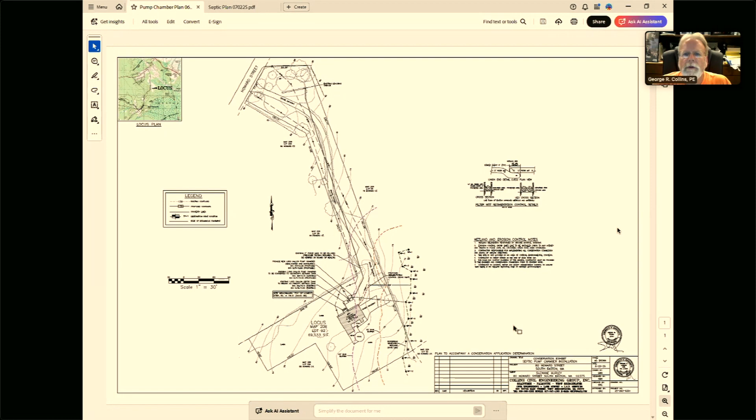Okay. So this is Howard Street up here. This is all existing long paved driveway that goes down to an existing dwelling here. And let's see, I am going to zoom in a little bit here. And then this is a bordering vegetated wetland, primarily located off-site. We have wetland flags 1 through 12 shown in green. The associated 50-foot buffer zone is shown in orange, and the 100-foot buffer zone is shown in magenta.

This right here is the proposed pump chamber. The pump chamber itself is 107 feet from wetland flag 7, which is the closest wetland flag to that activity. I am proposing sedimentation control in this particular area here. So basically, we needed just a little bit of room to back the tank delivery truck onto the property and to deliver the tank and to set the tank.

So there'll be an excavation right here, a little bit larger than the tank itself. And the tank truck will come in, back up, set the tank, and then the area will be loamed and seeded after everything's all hooked up and the electrical connections are all made. The wetland delineation was performed by Brooke Monroe, our wetland consultant.

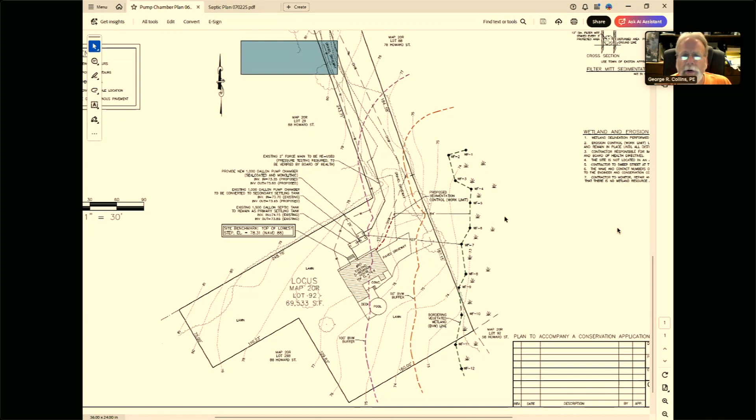So I put this plan together because I wanted to get on the agenda, and this is the applicable part of the project that is within jurisdiction. If you're interested, I could also share the whole septic design just so you have a little better understanding, if you're okay with that. I think it'd be helpful to see it if you don't mind. So let's see here. There we go. Is that a different plan there? Yeah.

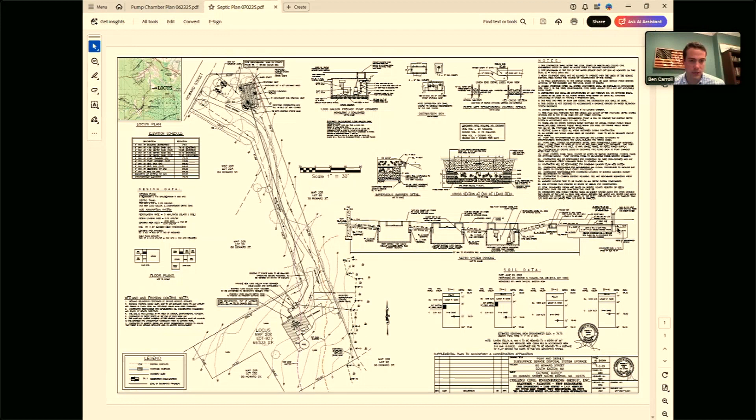Yeah. So basically, we were kind of in a big rush, so we just put together the plan showing the applicable portion of the project for the request for determination of applicability application. So the actual leaching field is going up here. There's an existing leaching field up here, and we're putting in a new leaching field. We're utilizing the same force main. There's a 2-inch pipe that pumps up the hill. Wow. To the leaching field. And basically that's all existing. And that line has been pressure tested, so we know that it can be reused.

So again, the actual project scope from the commission's perspective is identical. You have the 107 feet to the proposed tank. We have the proposed sedimentation control. And again, it's really just to accommodate the delivery of the tank. This is an existing lawn area, so the tank delivery truck can back down the driveway, deliver the tank, and take off.

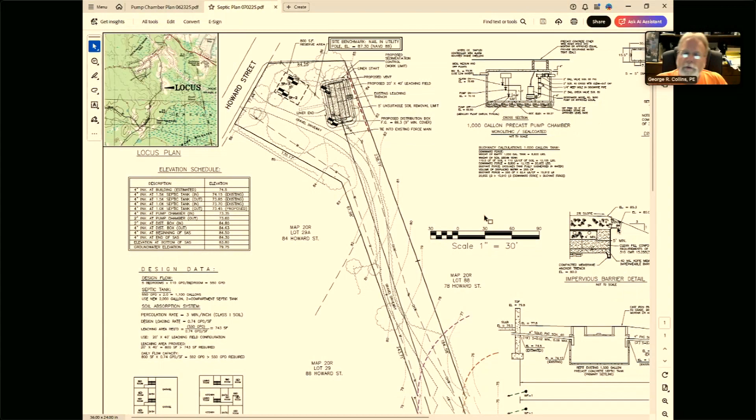And then we're going to tie into that existing force main, and as far as your jurisdiction is concerned, that's where the work will finish. And then up here is where the new leaching field is going to go, which is over 200 feet from the wetland. Just to kind of paint you a picture of the whole project.

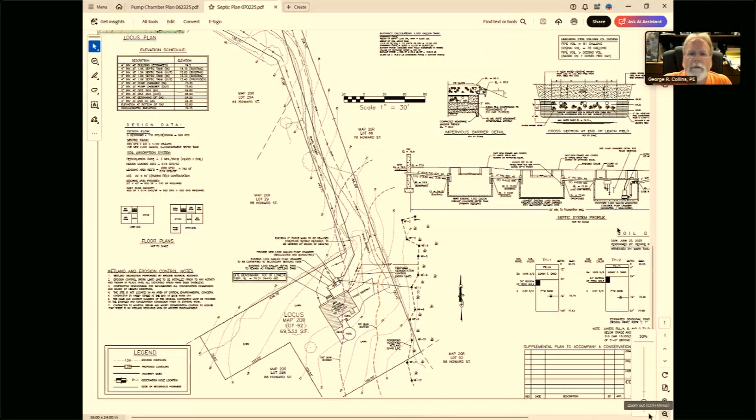I'd be more than happy to answer any questions that anybody may have. I don't think I've ever seen separation that far between a tank and a leaching field in my time here. So yeah, it's not ideal. This was a design done in the mid 90s, and basically all the soils down here are unsuitable. Yeah, but up by Howard Street they are suitable.

So basically they needed a new septic system, so we kind of tackled it with a similar approach. And the reason, again, might be more information than you need, but basically what we want to achieve is what's called secondary settling. So we're keeping right now, this is the existing septic tank and existing pump chamber.

Sorry, George, I stopped sharing on you. Oh, I thought we were just doing, yeah, no, I didn't realize you wanted to show more. Sorry, yeah, I did that on you.

That's all right. It's probably more information than you need to know, but basically we're adding the septic tank to provide what's called secondary settling. So the sewage will be settled out twice before it goes to the pump chamber, so it'll technically be cleaner. So we're going to have a bigger, cleaner septic system, more up to date. I spec out 2 compartment tanks on everything that I design, but in this case, we're converting the pump chamber into a secondary settling tank and going to a new pump chamber. So that's the reason why we're doing all this.

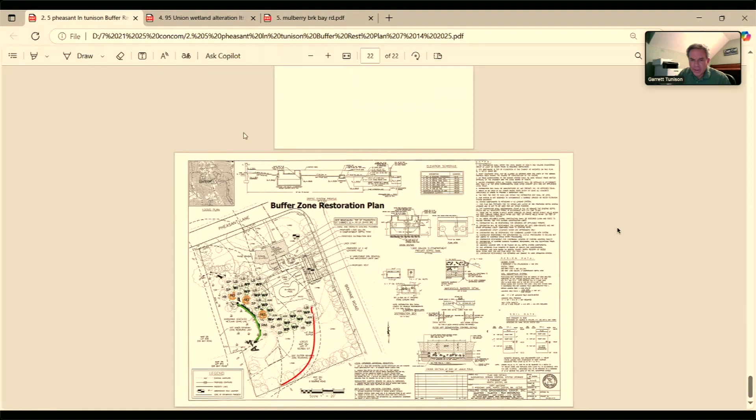So hold on a sec. I'm trying to get the file here. I'm grabbing it off another computer. I thought I had it and it's not on the flash drive, so it didn't copy. So I apologize. See if I can grab that right now. I assume what you're looking for is your restoration plan. Yes. So Jen, was that put into PermitEyes or did I just see it in the binder? Should be in the binder. There's no application, so it's not in PermitEyes. Did that load? I've been having trouble with my desktop. That's all right. You probably get it even faster. It's trying to connect to the server. Okay, thank you. It should be down the last page, the very bottom. Okay, we can't see your screen anymore, Garrett. Okay.

Yep. So that's it. So after looking at what was out in the field, I found many black cherry seedlings that were approximately a foot high, and I would say there had to be at least 75 to 100 plus. So what I felt, if we're going to replace anything, we should replace the same number of the eastern white pine that were cut, and I believe I put 1 or 2 oaks in there as well. So between those, I felt we covered the trees pretty well.

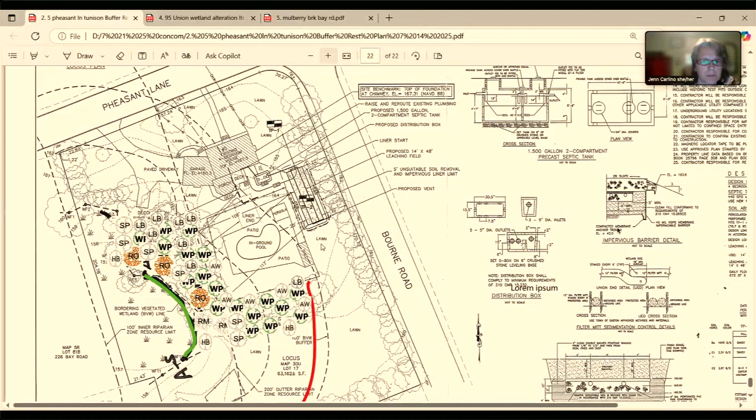What was lacking was a shrub layer. So what I wanted to do was add several shrubs. So we've added quite a few of the sweet pepper bush and the... Oops. Sorry, I was looking for the plus to zoom in. Oh, here we are. I'm sorry, Garrett, go ahead. The sweet pepper bush, and there are several southern arrowwood and low bush blueberry, high bush blueberry. So I wanted to make sure that we had a good mix of what I found in the adjacent uplands. So that's what we tried to do, fix those areas.

I don't feel that really any of those stumps will come back because they're eastern white pine, and they were relatively large in diameter. So we had a range from approximately 8 inches to 2.5 feet diameter at breast height, which is 4.5 feet. So that's what we had for a range for the stumps. That's what I estimated, so I think it's pretty accurate.

So we wanted to replace those trees that were cut, but then again, because those were cut and some of these may not survive, I wanted to make sure we had a good density, a nice mix of the shrub and tree layer.

As far as the herbaceous layer, there were a few invasive plants, and we're proposing to remove those first. A lot of them can be weeded. There was one large eastern burning bush that should also be cut and treated. We can do that. So I'm not certain if we would start the actual ecological restoration as far as plantings until possibly the spring. And the reason being is I want to get those invasives out of there.

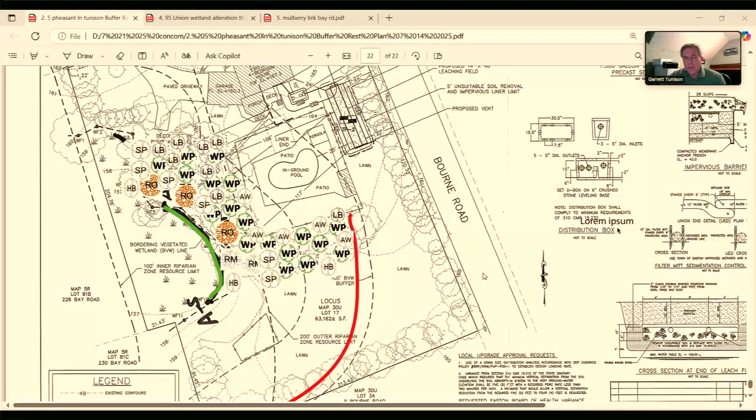There's oriental bittersweet. There was climbing nightshade. There were several. So I'd like to have those removed and eradicated prior to the restoration, if that's okay with the commission and Jen. I think that makes sense. And there is a layer of duff or leaf litter, and it's more pine needles than leaf litter. So we have a natural layer. The only area that needs to be restored is the area where the soil was removed.

The B horizon could easily be seen in the pile that was inside of the siltation barrier, the staked and tucked silt fence. So that material could be replaced back into the ground. And also, I believe there's an A layer there as well. It looked like a 2 to 10YR, so that could also be used. That may need to be improved if we don't have enough of an A layer.

So therefore, he may need either some soil amendments, or I would recommend a fine sandy loam of 10YR 2/1 to 10YR 2/2, which can easily be allocated. And we don't need much, it's not a large area. So this could easily be done. I believe the client is a landscaper. He would do this himself, and I would supervise. So that's the path that I believe the client and I will take. And we would do that, of course, in the spring.

That area will need to be seeded, and I've recommended using the New England wildlife mix, conservation mix in that area. So that's what we would use. We could also use a little bit of the dry grass mix to make sure it's stabilized. That usually comes in a little quicker than the other, especially if it's dry. So I typically like to mix those. I don't believe I included that, but that's something we would look at: if we have a real dry February and March, we would probably add that for planting in early April.

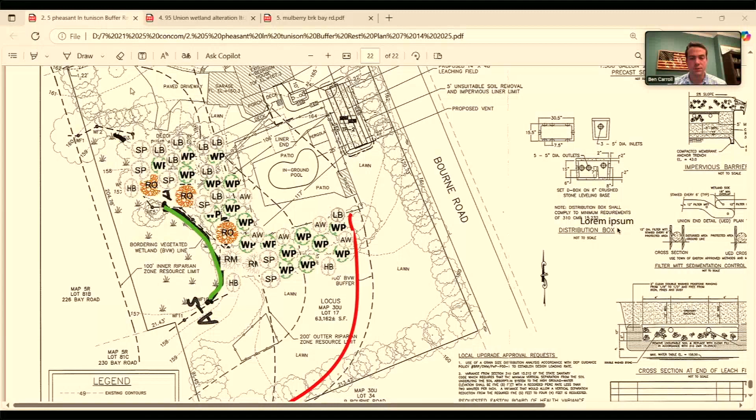Jen, I feel like every time we do one of these, I have to relearn the process. I apologize. Do we need a vote on the plan here? I'll just vote on the restoration plan. And then logistically, what happens? Right? Do they get an order of some kind? No, we'll just send them a letter that says the plan was approved, and we expect them to begin in the spring. And we'll follow through as they proposed. All right. Yeah. Thank you very much.

Motion to approve the proposed restoration plan for 5 Pheasant Lane. Spady, second. So moved. Carroll motion, Spady second. Roll call vote. Carroll, aye. Crossman, aye. Goodman, aye. Spady, aye. Vecchio, aye.

Thank you very much. Before I go, are there any questions for 23 Owl Ridge? I can't remember if we closed the public hearing on that or not. We're looking at certificate of compliance coming up. Yes. So that'll be next, and the treasurer signed off, so it's actually okay to issue a full. Okay.